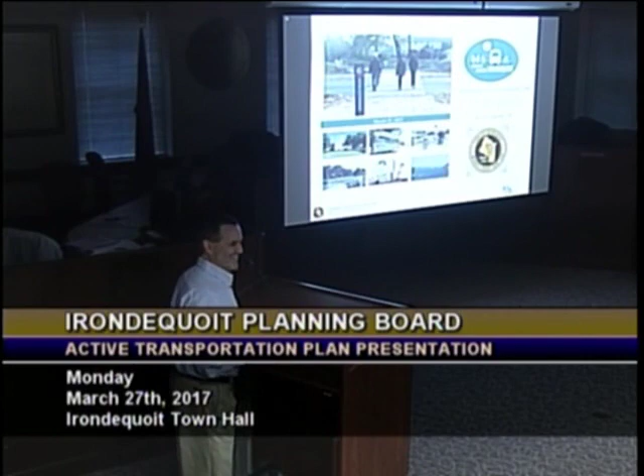So I'm not here for any site plan approval, but I'll give you a little entertainment here and a little education. My name's Tom Robinson. I'm with Barton and Loguidice, and I've been working with the town of Irondequoit—Cary and Bradley and the whole committee—for a little over a year now on the Active Transportation Plan. Some of the things in the Active Transportation Plan are very relevant to your responsibilities as planning board members. We'll just go through that. I'm going to give a quick overview of the plan and our process, and then I have some fun pictures of local examples that we can look at and see the good and the bad.

Active transportation is simply a means of getting around that's powered by human energy, primarily walking and bicycling, but in some circumstances other modes as well. The term expresses the key connection between healthy, active living, our transportation choices, and sustainable communities.

For Irondequoit, if you wanted to put it in a nutshell, the overall project purpose was to enhance the safety, accessibility, and convenience of active transportation options for people of all ages and all mobility levels. It was really inclusive thinking from day one, recognizing how transportation choices and activity modes affect everybody through all stages of life.

We are all disabled in one way or another at some point in our lives, whether it's just before we learn how to walk or when we get to senior citizen level. So it happens to everybody. If you've ever had an injury and had to be on crutches or in a wheelchair, you've experienced some of the barriers. So accessibility and providing mobility was a big focus of the plan.

Irondequoit is one of 9 communities that has active transportation plans funded by the Genesee Transportation Council. We're actually very fortunate to have the Genesee Transportation Council as an MPO in this area because they're very proactive and have a good structure in place for funding planning relative to bicycle systems, alternative transportation, and pedestrian mobility.

Of the 9 communities, I've had the good fortune of working on 7 of those plans. We brought a lot of that knowledge and those lessons learned into Irondequoit to assist with achieving the goals. Overall, there's over 400 centerline miles of roadway studied, with recommendations attached to that.

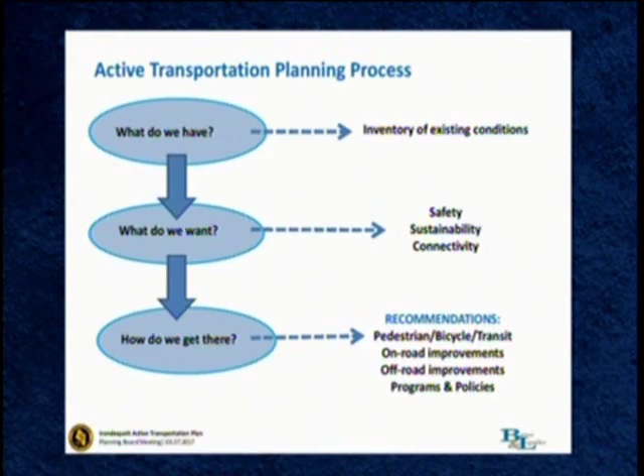Finally, we had a section on programs and policies, which is very important because infrastructure alone doesn't do it. We know how to build good infrastructure for bikes, pedestrians, and transit, but you need supportive policies, maintenance, education, and enforcement of regulations that keep people safe. All these things have to work together, and if you're missing one piece, the whole puzzle isn't going to come together. That's what the active transportation plan was about—a fairly inclusive and cohesive exercise that touched on all these things.

In terms of town code, we looked at the existing town code as it relates to bicycle and pedestrian facilities and made some recommendations about things that might want to change in the future. One of our key references was the bicycle and pedestrian supportive code language produced by GTC several years ago. That's included in the plan as an appendix—a great resource with templates you can look at to see how that would apply to eventually amending your own town code.

They also have a lot of case studies from peer communities—other places around New York State that have made changes to better support pedestrian and bicycle mobility. They also have fact sheets looking at specific elements for active transportation and supporting policies. All of that is in the plan, available to you as a reference. We tried to make a good compilation of existing resources that might help you do your own jobs.

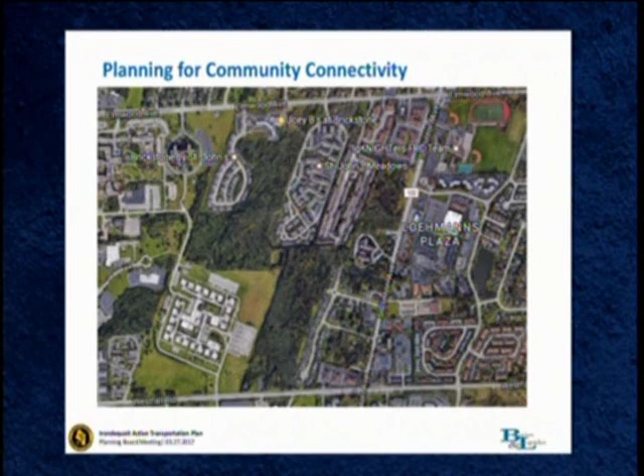However, also in Brighton, they've done some very good things in some of the older neighborhoods. Edgemore and Ashbourne are really two parallel streets in the same neighborhood, but somewhere along the line, planned in were these little connections between the two streets. So somebody was thinking right, and as the subdivisions were planned, there was enough of an easement space left that you could connect one subdivision and one development to another.

So kids on a play date don't have to get in the car with mom and drive all the way out to the main road and around and come back in. They can simply walk down their street and take a nice pedestrian-safe connection and move around that way. So those are the kinds of things that it's great to program into a residential subdivision when you can.

We noted that Irondequoit has a lot of that going on. So the micro trails, as we like to call them in Irondequoit, we categorize some of those. We map the ones that we could find. We make recommendations for some new ones. So there's some of these real neat kind of under-the-radar connections and passageways out there.

You just want to encourage more of those because people trying to walk find them, people on bikes find them. If you can formalize them and make them safe and convenient, you're going to reduce the number of car trips, which is taking the pressure off the whole system.

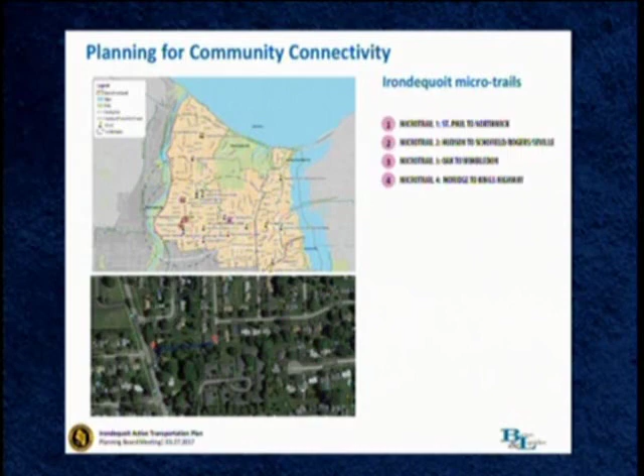So you've heard the term complete streets, and that's simply designing an environment that gives equal consideration to all modes of travel. Recognizing that automobiles will be the dominant mode of travel, but that should not be to the exclusion of the other ways we have to get around.

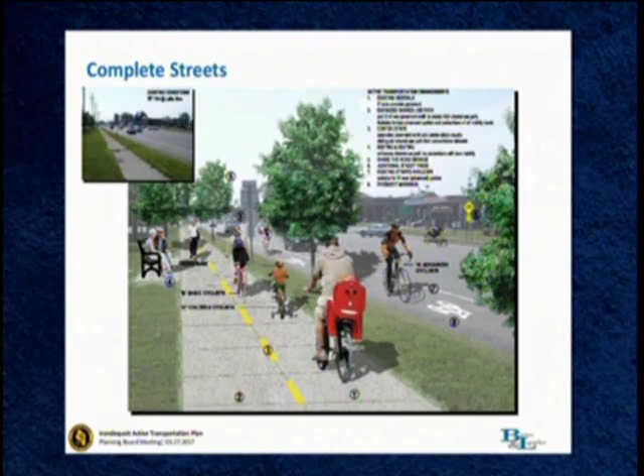So that's kind of a design standard that's just a good thing to have in the back of your minds. As you evaluate proposals, you can see if developers are, by chance, providing that with their plan. Not many of them do, but it's not the kind of thing that breaks the bank, and it can make a big difference to pedestrians.

So here's Monroe Avenue, close to 12 Corners in Brighton. You'll notice the upper left was existing conditions. This is right at the Brighton Central School campus. So why you would ever put sidewalks right on the curb like that in a school zone just baffles me. But that's quite frankly a horrible placement for a sidewalk for a number of different reasons.

I have other pictures that actually show it in a rain event, splashing people on the sidewalk because the drainage isn't perfect, it pools against the curb. So you're kind of hugging the grass as you try to walk there. There are a lot of walkers to the schools. That's a high volume, relatively high speed roadway. So with no buffer zone, it's a frightening environment and sort of the opposite of supporting and encouraging pedestrian movement.

Over the last couple of years, the town of Brighton has received funding to do some retrofit and some upgrades along Monroe Avenue. That's the same spot in the lower photo. With the cooperation of the school district, we were able to move the sidewalks about 30 feet inboard into the school campus, so a much more attractive design. They're wider—7 feet wide, so it's like a really big sidewalk or a small multi-use path. But it works fine for everybody moving, even in peak times with walking and bicycling to the school.

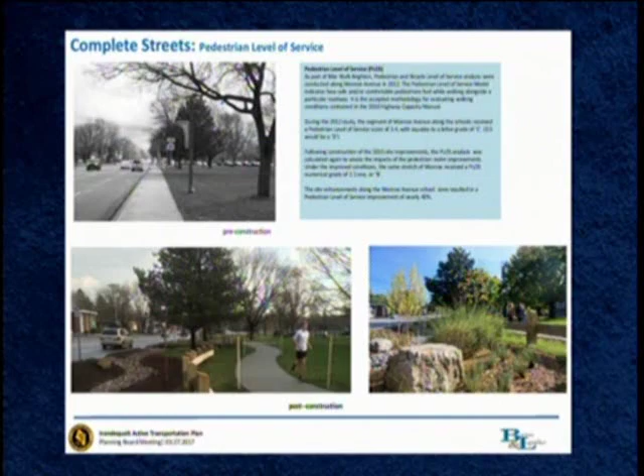There's also a numerical scale, and that was basically a 40% improvement in level of service just from doing these changes. What the level of service tells you is it's kind of a predictor of how much pedestrian trips you're going to bring in based on the type of environment that you're providing. So that was a big improvement, and that's just a good way to document the impacts.

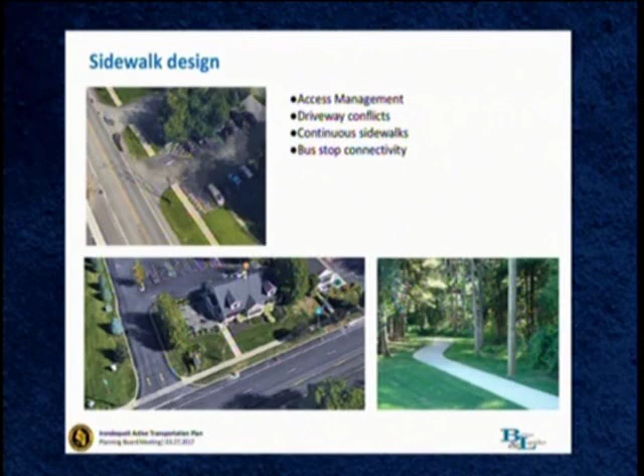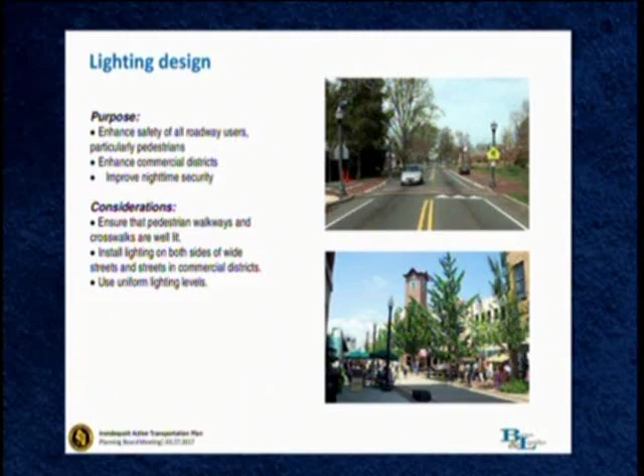Lighting design is one of the things we ask you to look for in the checklist. It has safety impacts and community character impacts. Good lighting, even pedestrian-scale lighting focused on pedestrian safety, really makes it safer for everybody. When you make things better for bicyclists and pedestrians, you're also making things better for people in cars. Your zoning code has its own regulations for lighting and different applications. Lighting is almost all LED now, so energy consumption is handled. Dark skies compliant lighting is something to think about. Don't just think of it as something you have to do, but as something that can really add to the project and have positive impacts.

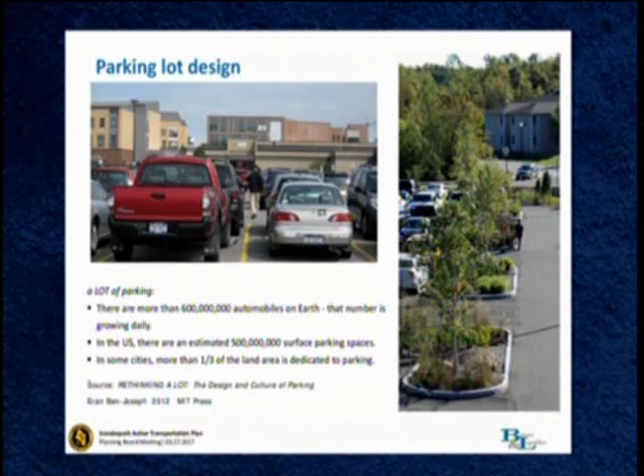So parking lots really can be done a lot better than we normally do them. It's nice if you can push developers a little bit and see what you can get out of them. The argument always is costs, and I need as many parking spaces as possible. But there's a happy medium—there's a quality versus quantity equation you can come to that's right for a particular development.

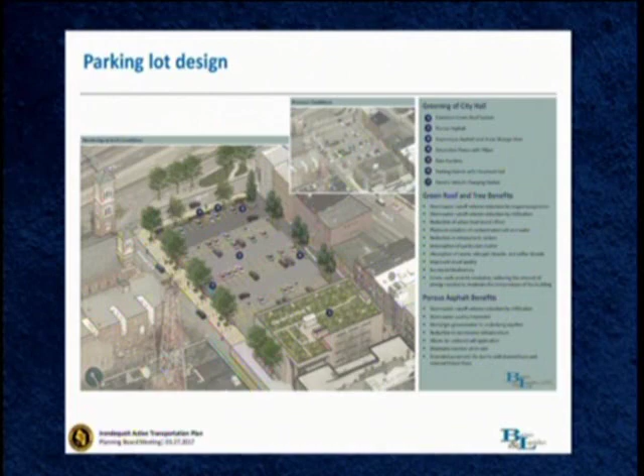And then they integrated rain gardens around the outside edges that serve two big purposes. One is to handle stormwater from the conventional asphalt, and the second is to upgrade the streetscape for the surrounding streets. So that's the edge of the lot—that's Allen Street. That's Nicole, my model.

You can see that it's just a pedestrian environment, and this is close to our office, so I walk by here. I keep an eye on this landscape since we worked on it. You can see people actually taking a walk just to come to this place and look at the rain gardens. So now you're doing more than allowing for pedestrian movement—you're actually creating places where people want to walk to the next level.

So ideally, every new development around Rochester should be a place that people want to walk to, right? That's just something to keep in your head, and it doesn't take a lot. Again, it was the funding for stormwater management that put in these streetscape elements, but they served several different purposes, so you get a lot of bang for the buck.

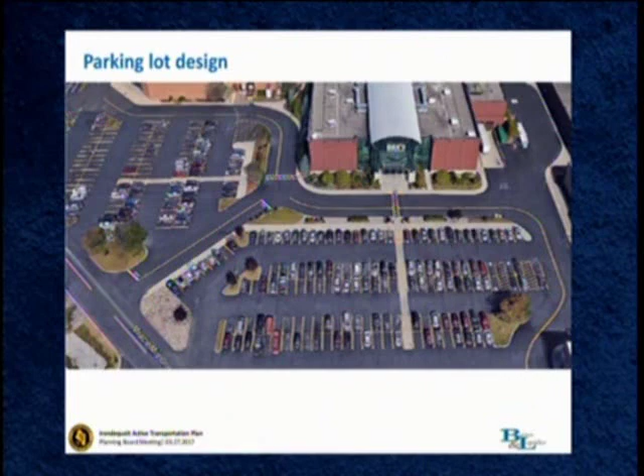Facilities at destinations—bicycle parking is something your code can support. There's all kinds of examples of this in the active transportation plan. LEED guidelines are familiar for LEED certified buildings, and there's also LEED for neighborhood development. So there's a lot of national level design guidance for things like bicycle parking now.

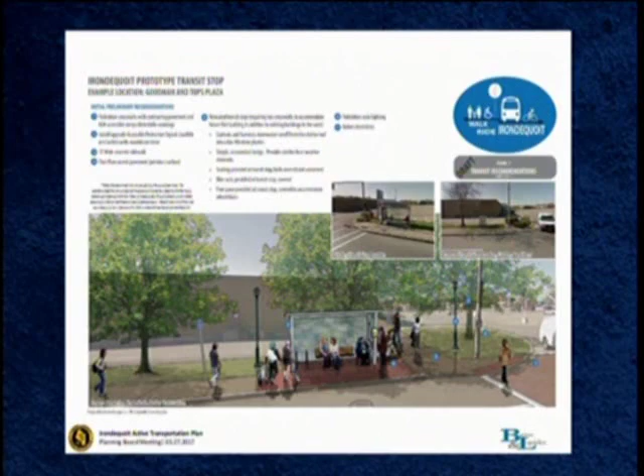And then the last thing I wanted to say on that is the statistic I love, and this comes from the GTC, that in this area about 60-some% of automobile trips are less than 5 miles. So most of the time you're getting in the car, you're going somewhere that you might well be able to get there by some other means. So it's all about mode shift, just shifting small percentages of short distance automobile trips to some other transportation mode can make a big difference in the community.

I think that's the end.

Oh, thank you, Tom. Just for the board's benefit, we have a final draft document. It's too large to email, but I have a link that I'll be sending you all. We wanted to make sure that we circulated it to the county DOT which is reviewing the final draft, and the town board just got it at their workshop meeting just a week ago or so. So I can send the link so that you'll have a copy of the draft. And then when it's final, we're not anticipating significant changes. There might be some minor adjustments to the document at this point, but it's pretty solid as far as the recommendations go. We can make sure that you have it so it's a reference and a resource if you need it or want it.

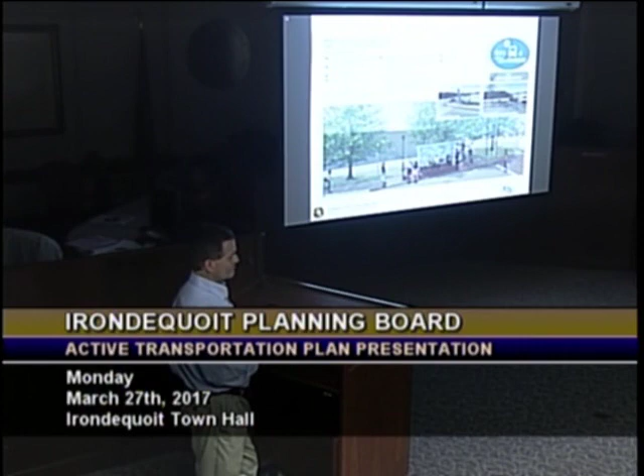Once approved, these will be guidelines. It's an active transportation plan. There are recommendations in it. Certainly something that this board can look to, but it's not codified. Although someday. Yeah, thanks. You're welcome.

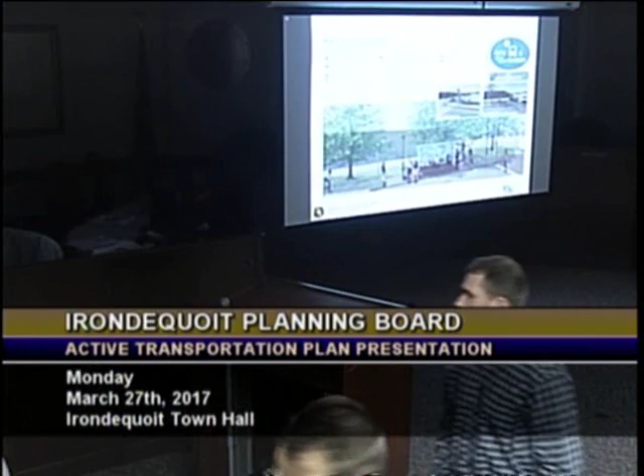As far as we can, but we can't deny anything.

Thank you very much. They gave them to us at the work session. Oh, did they? Okay. Did everybody get a chance to look at the minutes? They're right in front of me. Did you guys get a chance to look at these? No, I did not.

He can't vote, I can't because I wasn't involved. We can wait. I mean there's 4 of us. Is it enough? It's just Michelle. Michelle, is 4 enough? Yes, sir. Yep. Oh, okay. Because we have Bernie Wayne one, Evelyn two, Mary three, Howard Beck, Brad Huber, and Spencer Reed. But Spencer said he didn't get a chance to read them. I didn't realize they were in my packet from the last meeting. So 4 is enough. I'm ready to go. Okay. Assuming it's unanimous.

We're looking at the minutes from January, correct? January 30th, 2017? Would somebody like to make a motion on those? I'll make a motion to approve them as is. Do I have a second? Second. Thank you. And for the minutes dated February 27th, 2017, do I need to take a vote?